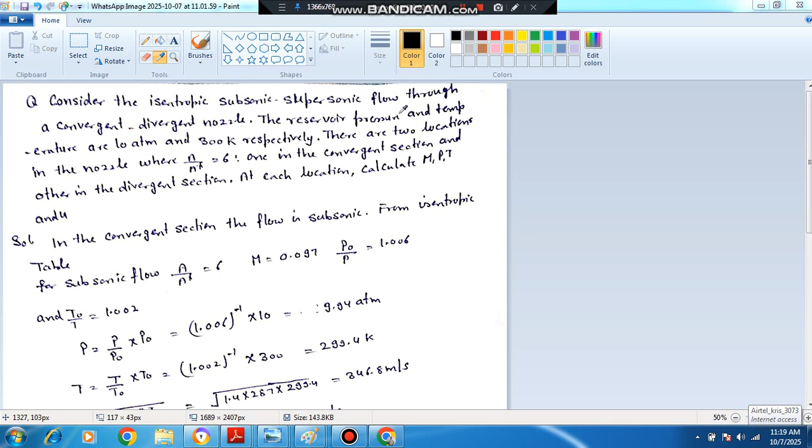Hello, welcome again. We are covering the subject compressible fluid flow for civil services mains, IFS and GATE aerospace exam. We have covered the topic variation of properties along the nozzle with area ratio.

So now we'll solve the numerical based on that topic, and that question is: consider the isentropic subsonic-supersonic flow through a convergent divergent nozzle. The reservoir pressure and temperature are 10 atmosphere and 300 Kelvin respectively. There are two locations in the nozzle where A by A star is 6, one in the convergent section and other in the divergent section. At each location, calculate M, P, T and U.

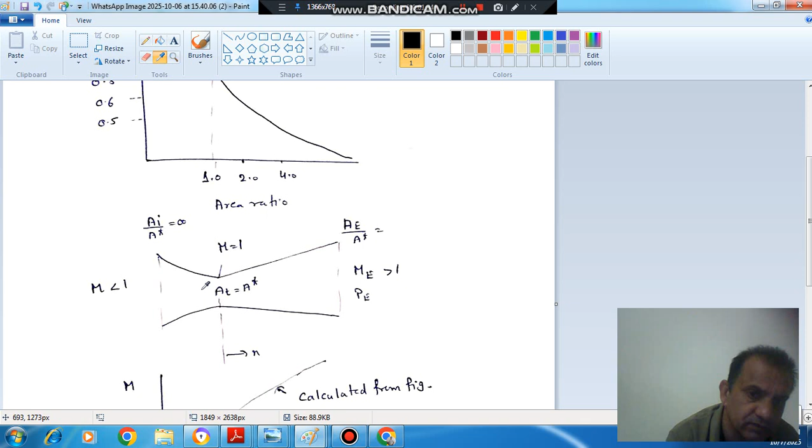So first of all, we will take the convergent part. So this is your nozzle that we have discussed in the last article. This is convergent part, this is divergent part. First we are taking convergent part. Suppose A by A star is your 6 here. Then from the isentropic table, according to A by A star is equal to 6, we can see the various properties.

So here, this is your isentropic table, and as we are considering the convergent part, there will be subsonic flow. So corresponding to 6 area ratio, here it is 7.2 because it is 0.7262 into 10 power 1, and this is your 5.8 because 0.5822 into 10 power 1 is 5.8. So 6 lies in between here. So we will use interpolation and we'll find out Mach number.

So it is approximately between 0.1 and 0.08, or by interpolation we can find out this. So this will be 0.097, because 6 is very close to 5.8. So for A by A star equal to 6, it will be approximately 0.097, or we can use interpolation. And now corresponding pressure ratio and temperature ratio can also be noted from this table.

So A by A star corresponding to 6 in the subsonic part gives M as 0.097, P naught by P is 1.006, and T naught by T is about 1.002. According to 5.8, the temperature ratio is 1.002, density ratio 1.005, and pressure ratio 1.007, and these are very close. So T naught by T is 1.002, P naught by P is 1.006, M is 0.097. So this is the Mach number at the location where the area ratio is 6.

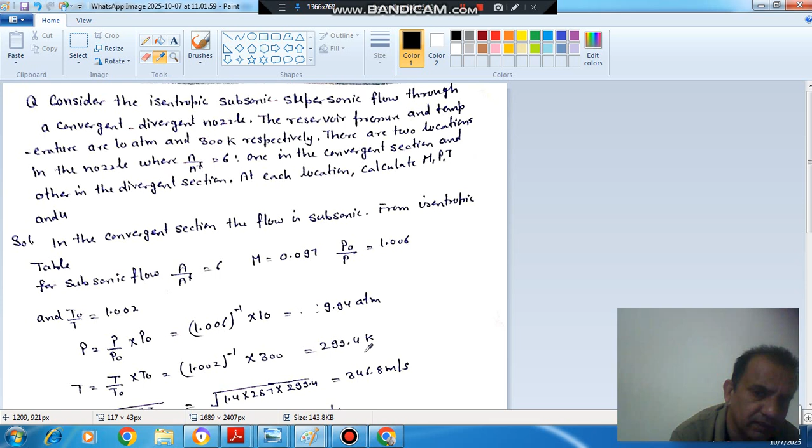And now we have P naught by P, and we also have P naught, that is 10 atmosphere, so we can calculate pressure at this location. That is 10 by 1.006, so that will be 9.94 atmosphere. Similarly, T is T by T naught into T naught. T naught is 300, T naught by T is 1.002, so that is 299.4 Kelvin.

Similarly, sonic velocity, because we need to find out M, P, T and U. P and T are there, M is 0.097, and sonic velocity is root gamma RT. T is 299.4, gamma is 1.4, R is 287, so that is 346.8 meter per second. And velocity is Mach number into sonic velocity, 0.097 into 346.8, so that is 33.6 meter per second.

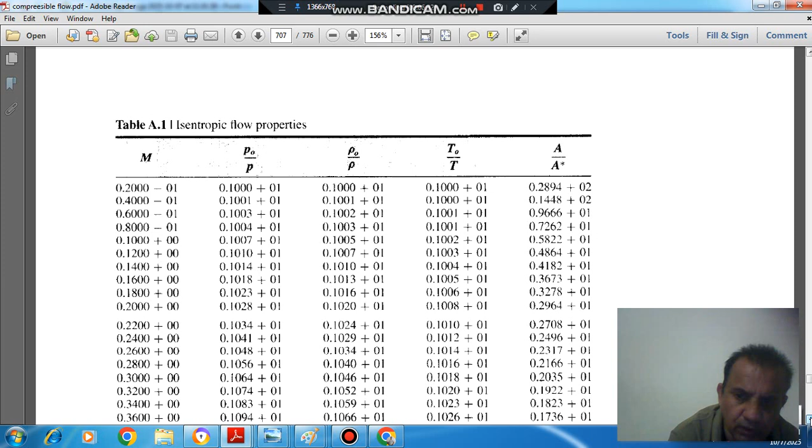And now in divergent section, A by A star is also 6, because this is given. This was the value corresponding to subsonic flow, where Mach number is less than 1. Now we'll see the corresponding value according to supersonic flow.

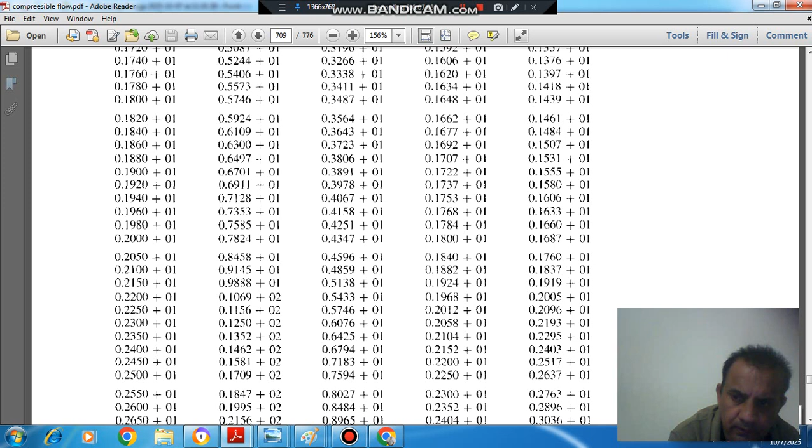We have to put 6. This is 1.439, so we have to move down, this is 2.6. Now here it is approximately 5.9, and 6 is between 5.9 and 6.1. Corresponding to 5.9, the Mach number is 3.35, and corresponding to 6.1, it is 3.4. So again using interpolation, it will be 3.368 for A by A star 6. And then the stagnation to static pressure and temperature ratios.

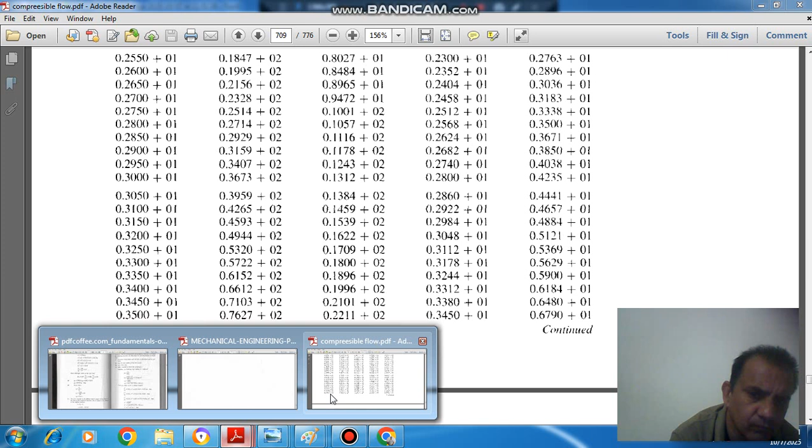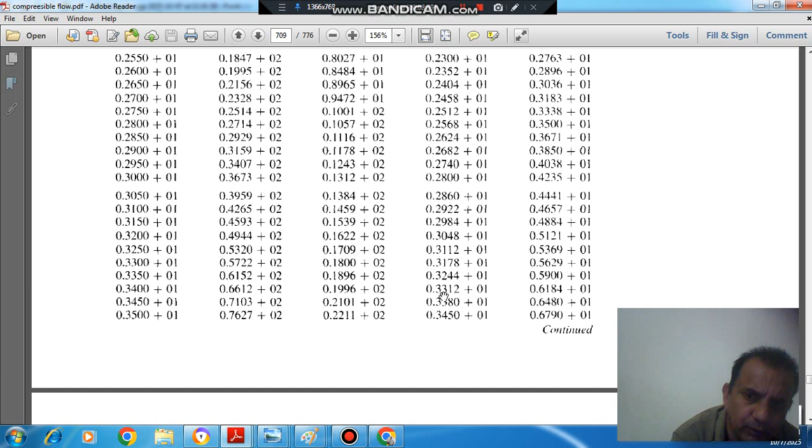These values can also be noted down from this table. For more accuracy we can use interpolation. This is your pressure ratio, approximately 63.13, because these are the values, 61.52 and 66.12, and temperature ratio is 3.244 and 3.312. So using interpolation we can find out the exact values.

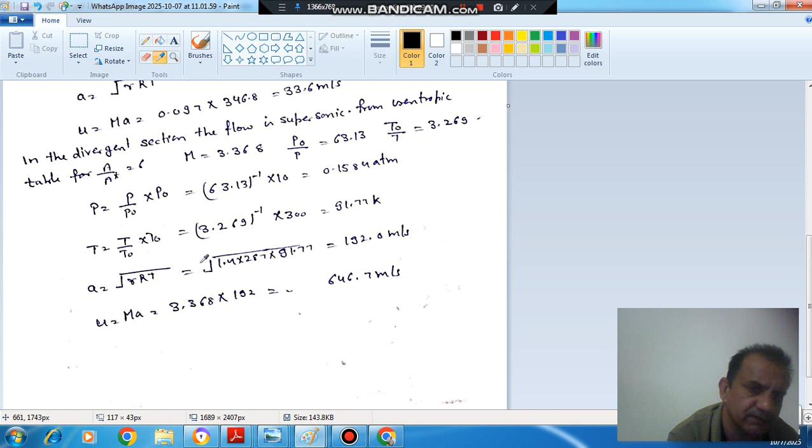So P naught by P is 63.13, and T naught by T is 3.269. So we can find out pressure, because the pressure ratio and P naught are known, that is P naught by 63.13, and T is T naught by 3.269, that is 91.77. And the same way, the sonic velocity at this location is root gamma RT, with 1.4, 287, 91.77, that is 192 meter per second.

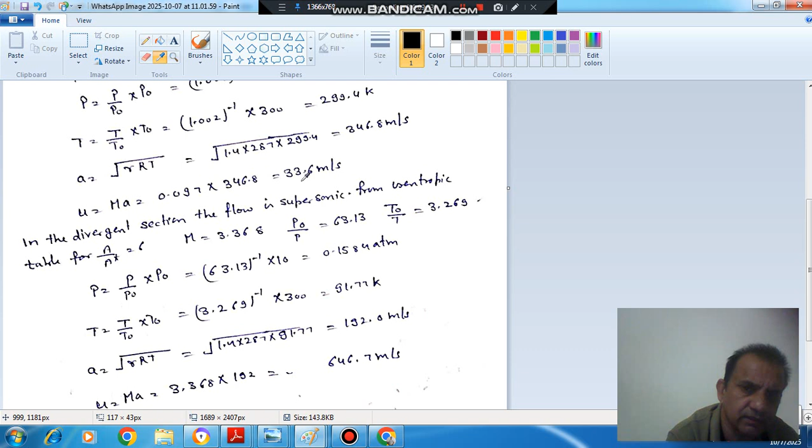And Mach number is 3.368, so U is 646.7 meter per second. So we are getting different velocities in convergent and divergent sections: in the convergent section it is 33.6 for the same area ratio, and in the divergent section 646.7.